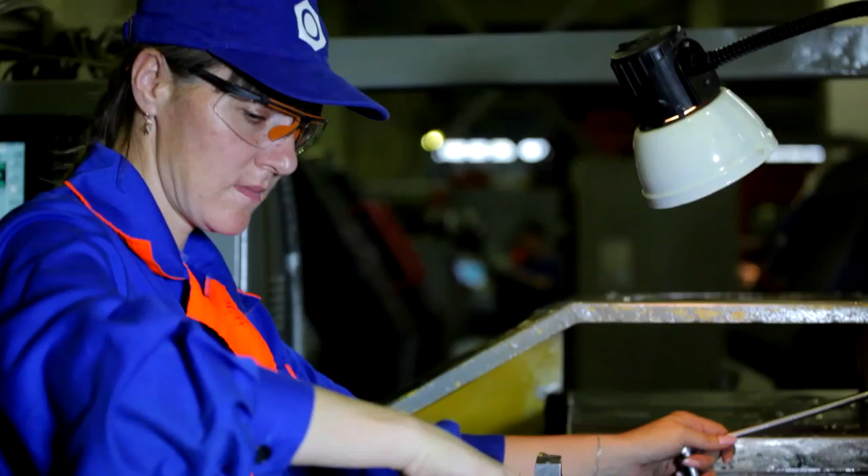Technovek is a multi-profile enterprise. The initial stage of its operation takes us back to the year 2000, and it was certainly the toughest one. We started by only producing studs and nuts for the needs of Lukoil Corporation. It was only the beginning of the great path.

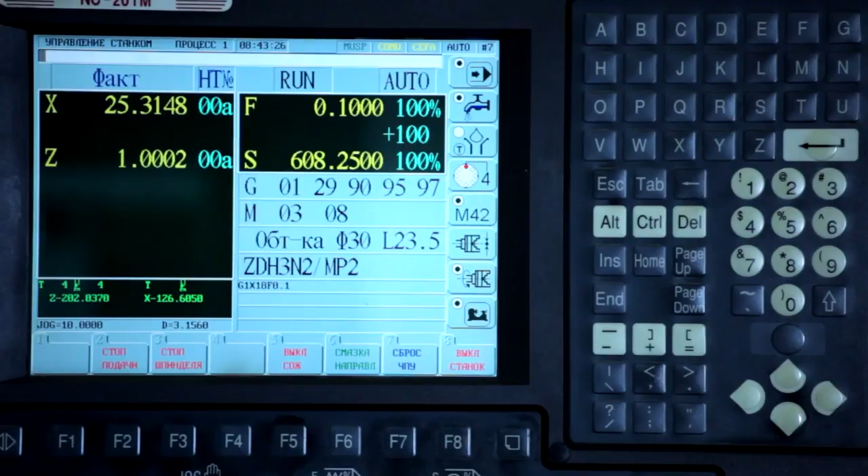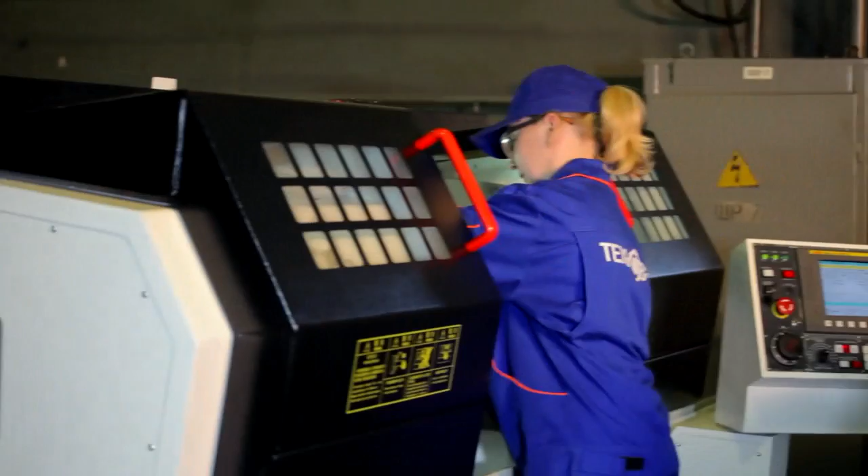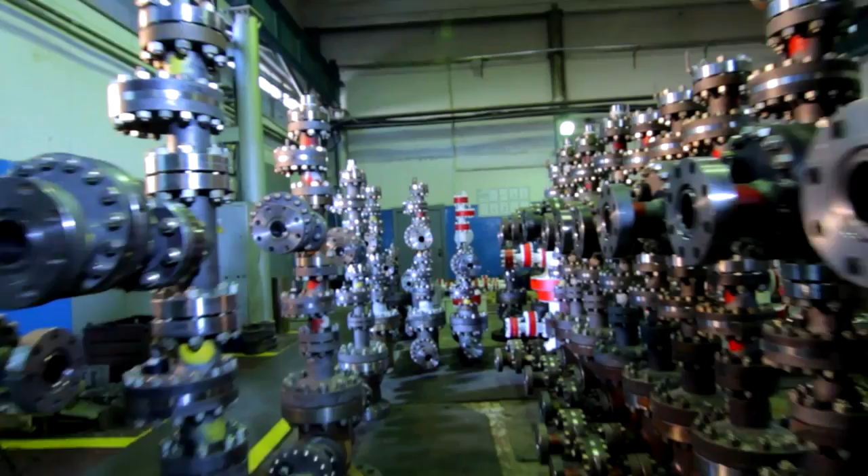Daily, Technovek was working on the development and implementation of new cutting-edge technologies, along with upgrading the company's production equipment. Technovek implemented its own development plan, which consists of several parts, such as increasing production volume, broadening its production line, raising its performance level and competitive ability, broadening its client base, and creating new workplaces for people.

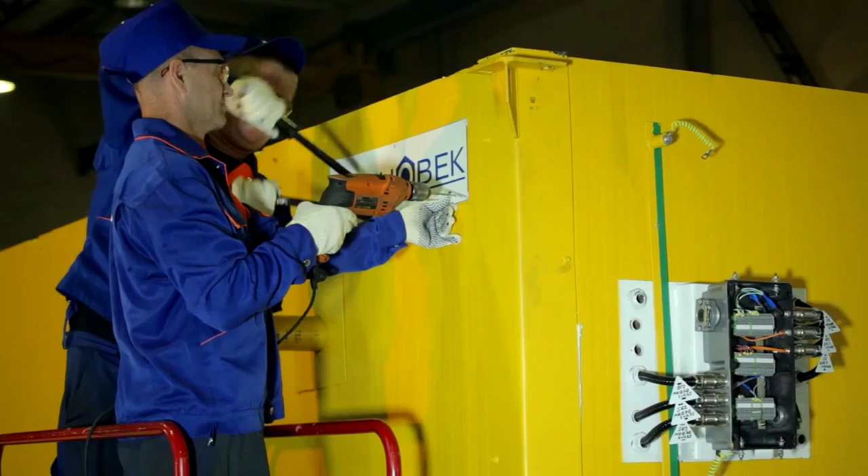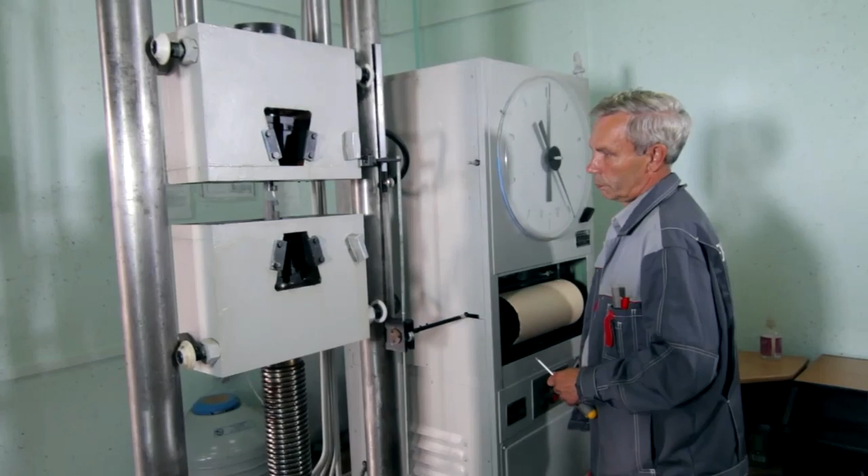As of today, our product quality complies with all requirements of the ISO 9001 standard, which guarantees high-quality production of all styles and shapes. We're currently in the process of acquisition and approval of the API Q1, 6A, and 6D certificates, which we will acquire within approximately 6 to 9 months. It is only the start of our brand management and quality control system.

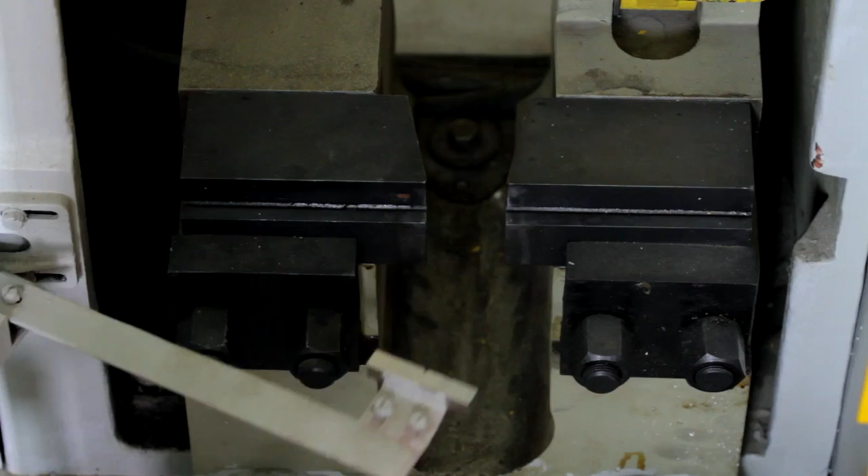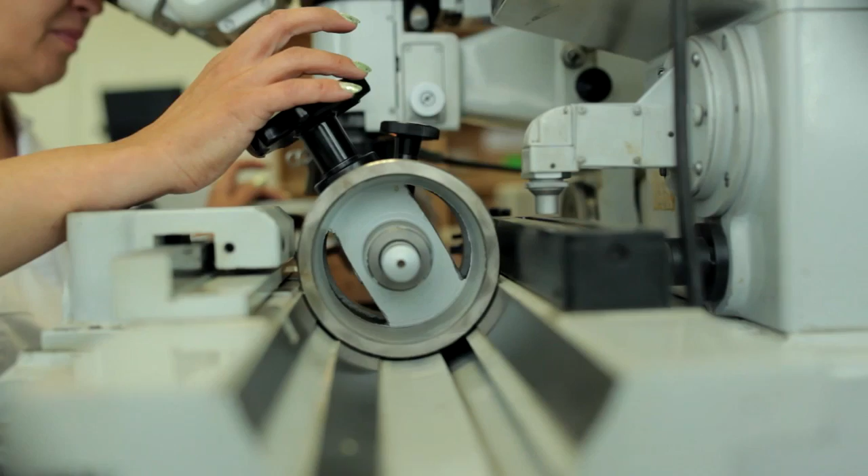In our research lab, specifically designed for conducting destructive and non-destructive studies, our specialists test various materials for their chemical and mechanical features. We conduct tests for tensile strength, resource, and resistance, including tests at below zero temperatures. Ultrasonic, surface, and capillary tests are also part of our routine.

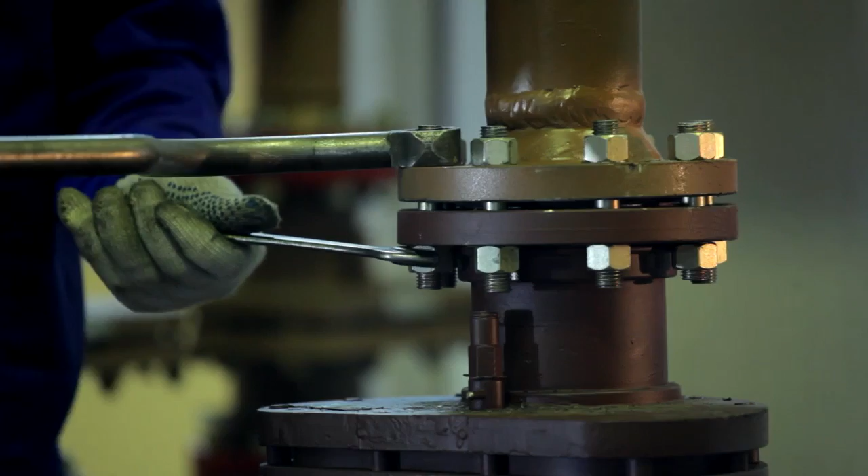Regular checking and calibration of measuring tools and equipment takes place in our other lab and is conducted by certified professionals. Today, Technovek has gained a reputation as a reliable partner and maker of quality, competitive oil and gas equipment.

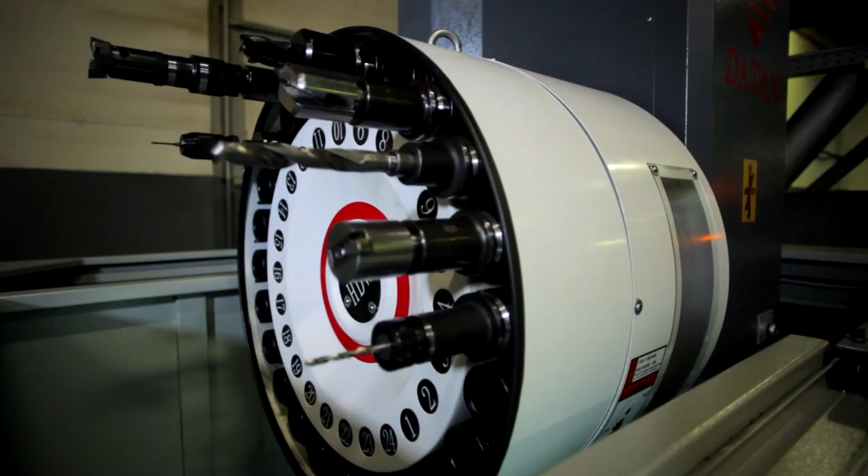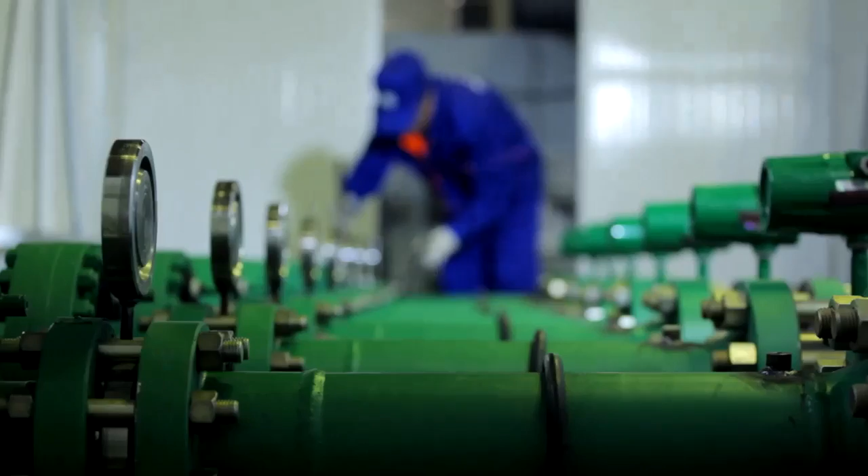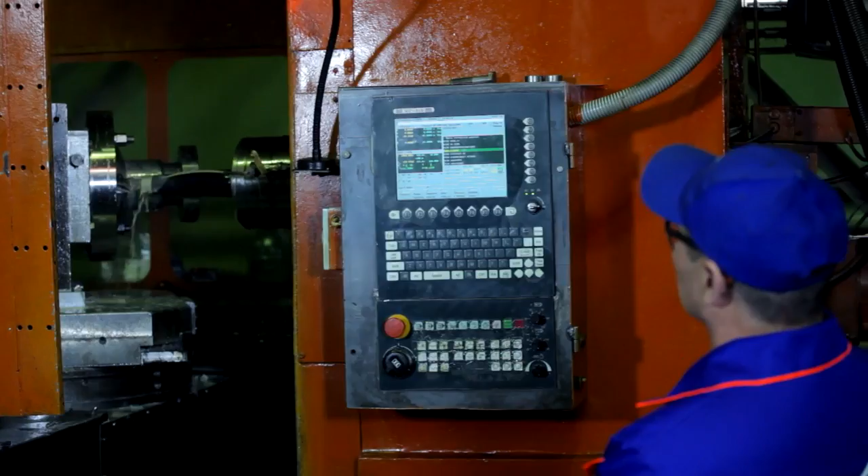Since 2011, we follow the newly, scientifically developed concept of thrifty operation, based on management of unnecessary losses and waste, involving not only management but also all employees of the overall Technovek facility. In line with the well-known 6S system, we follow all principles of safety and security for each workplace and the plant at large. With this, we are also successfully managing the effectiveness of pure work time at every workplace.

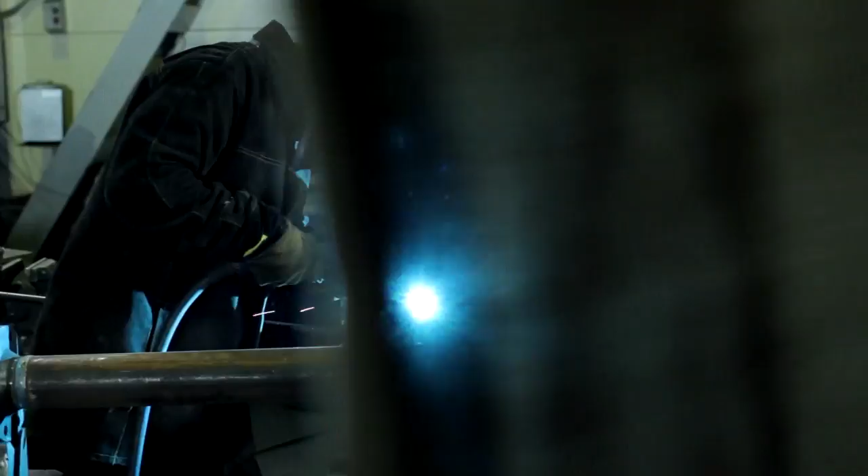Safety and quality are slogans for our employees. Employees are the ones who certainly make it happen. So one of the key aspects of our care and focus is a social vector and responsibility.

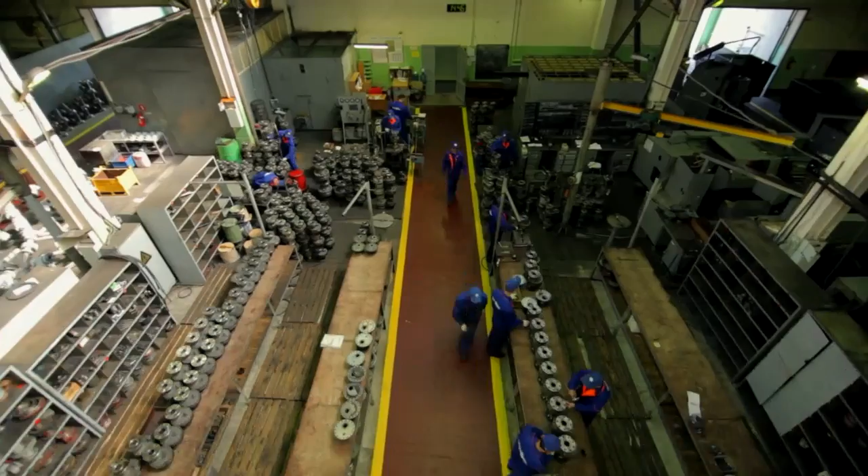Our enterprise employs over 1,000 people. The average age of an employee is about 35 years old. We pay people well above the federal average wage, and on top of the mandatory social obligations, we offer our employees a variety of other benefits.

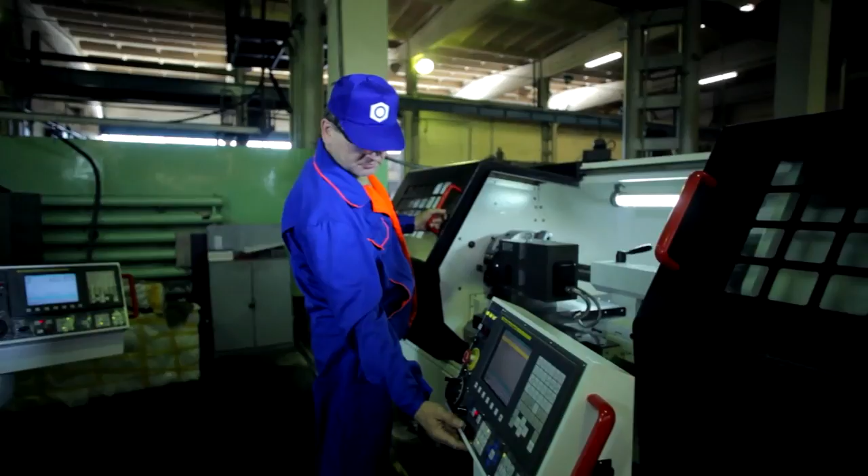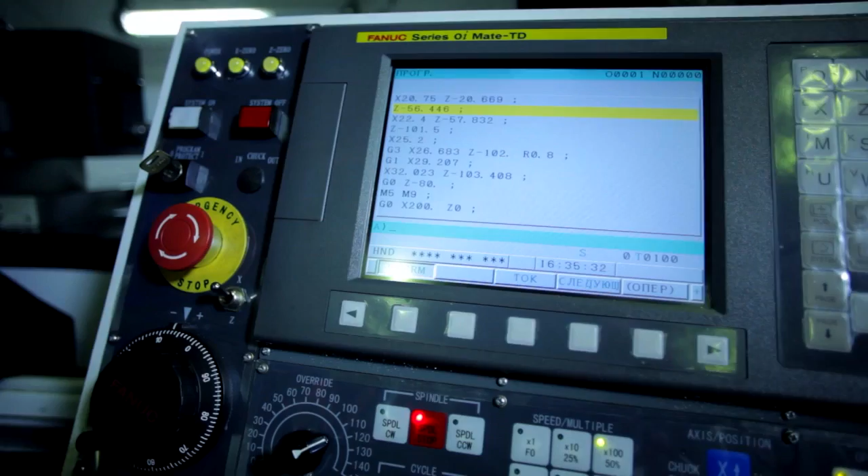In our days, modern technologies are developing and progressing with impressive speed in the 21st century. Something that was cutting edge yesterday is barely useful today and almost obsolete tomorrow. We heavily invest in new technologies and research.

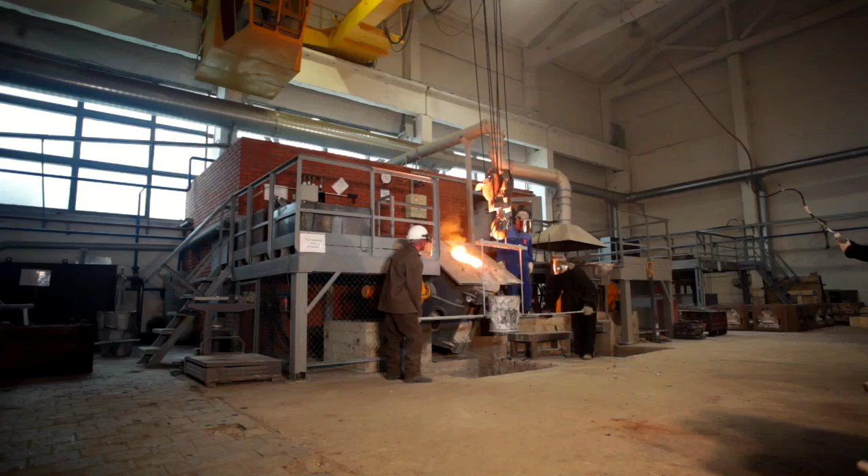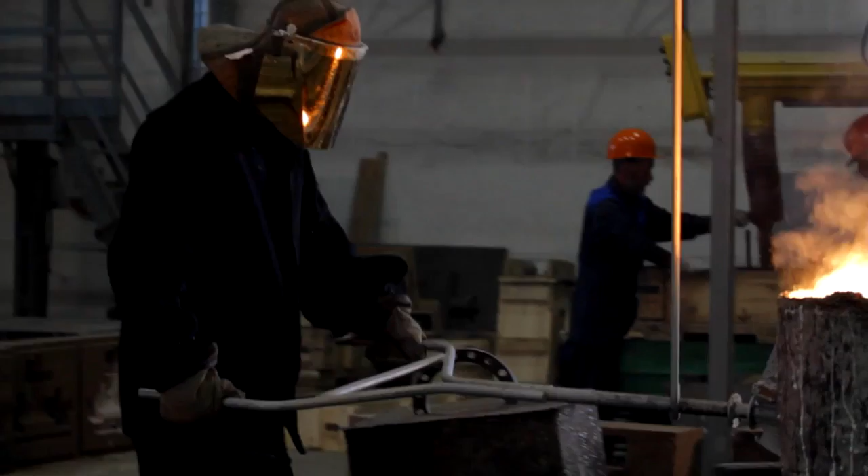Thus, from 2012, we have launched our own foundry, which allowed us to better and faster accommodate our clients' requirements and rely only on our quality standards without depending solely on suppliers. Since launching, we have mastered the cold hardening casting method. We also launched our DC arc furnace and induction furnace as well.

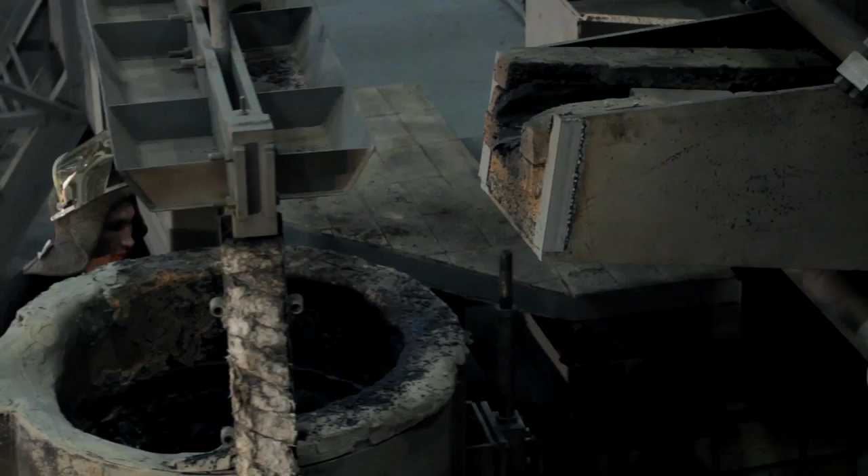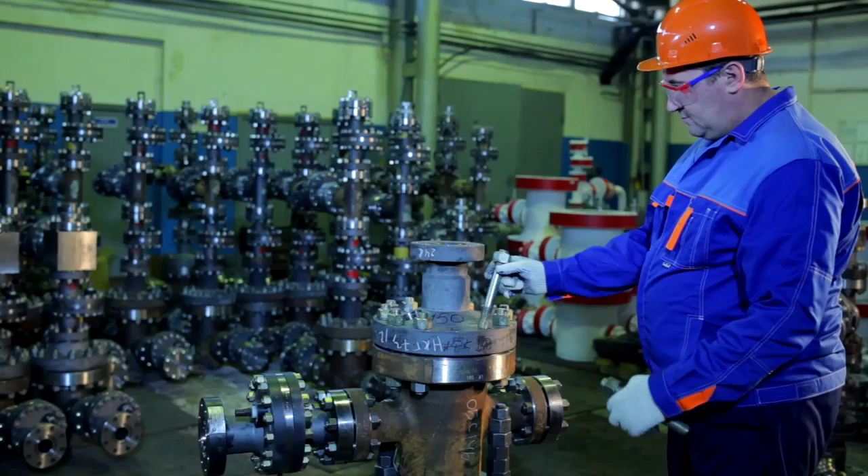The Technovek plant is situated on 10,000 square meters of land. Over 350 pieces of equipment of various complexity operate on a 24-hour cycle basis in 14 industrial buildings. Monthly, we produce over 4,000 various gate valves and over 500 various modification Christmas trees.

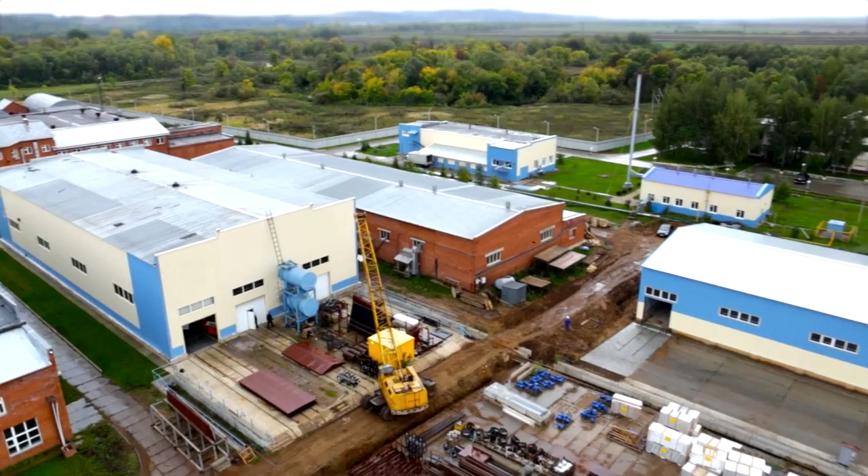With the broadening of its production line, Technovek is constantly buying new equipment from world-known brands that guarantee high quality. We are also currently in the process of constructing a new building which will be home to a large block equipment assembly shop, an additional warehouse, and another administrative building.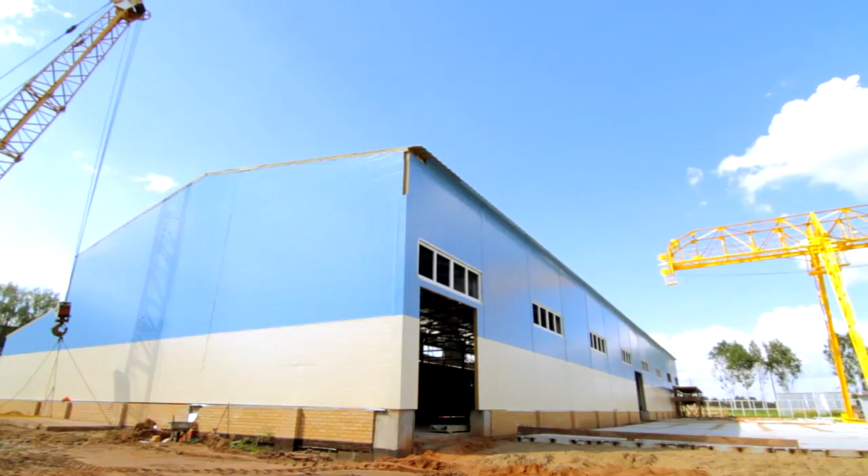Our construction and design department is aimed at our product specifics and is capable of fulfilling all kinds of complicated technical tasks. It employs 40 highly educated professionals who carry out all design and technical documentation strictly following the Unified Design Documentation System.

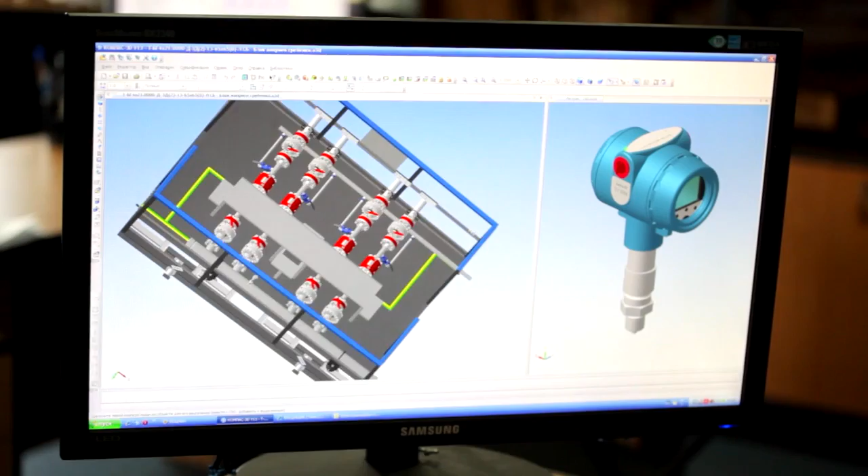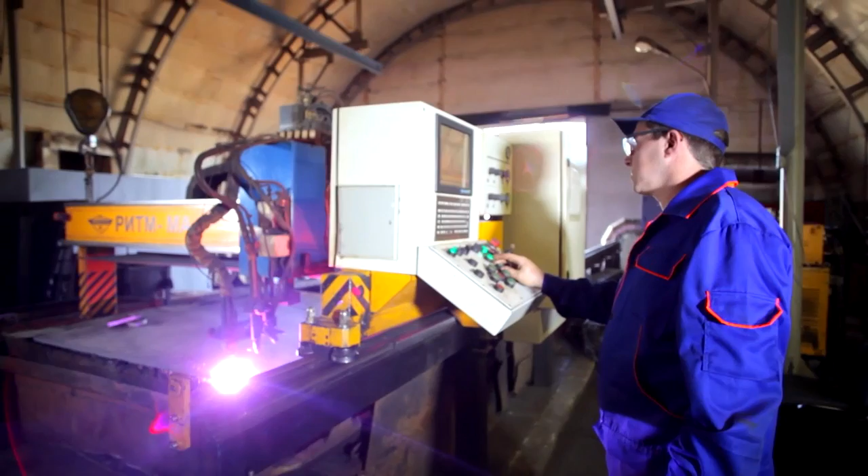The latest cutting-edge IT technologies are used. During its years of operation, the design department developed and introduced over 1,500 various complexity technical solutions. 16 of them are officially patented and 30 more are currently in the process of having their patent rights reserved.

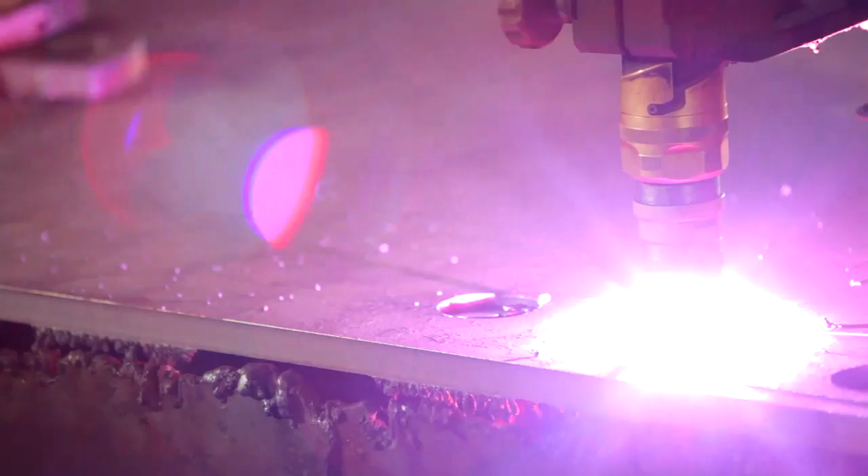Technovek is regularly audited on an annual basis. In the past, we were audited to comply with ISO 9001 certification of quality. In the year 2016, we will be audited for compliance with API standards.

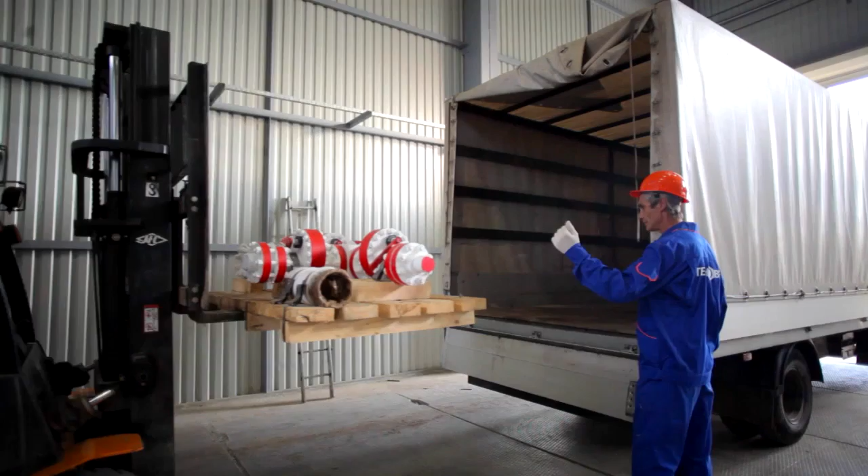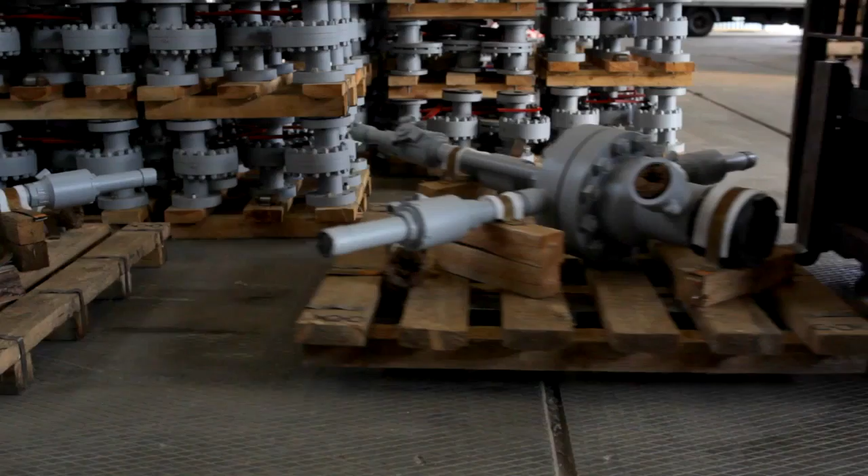Technovek is constantly looking to widen its production line and add various new products to it. Our catalog offers over 200 different units of equipment, and each of them could be manufactured in various different modifications.

Our production line features wellhead equipment, reservoir pressure maintenance equipment, shut-off and control valving, filtering equipment, lubricators, pipe isolating systems, and measuring units. We produce our equipment in accordance with customer specifications.

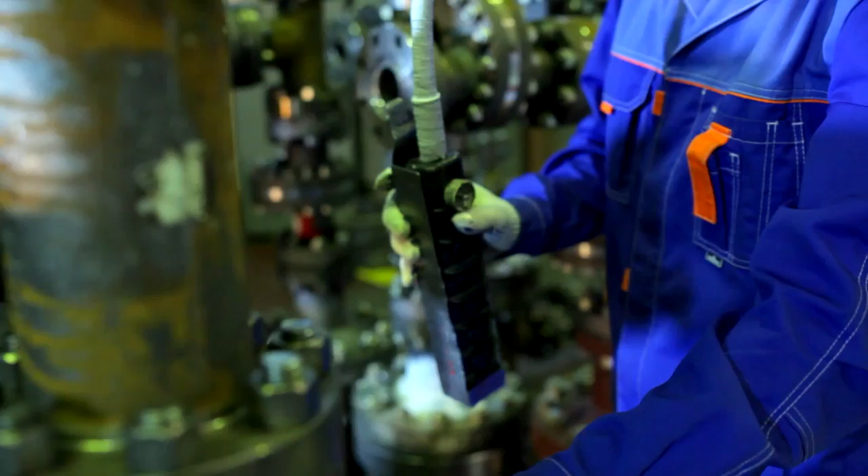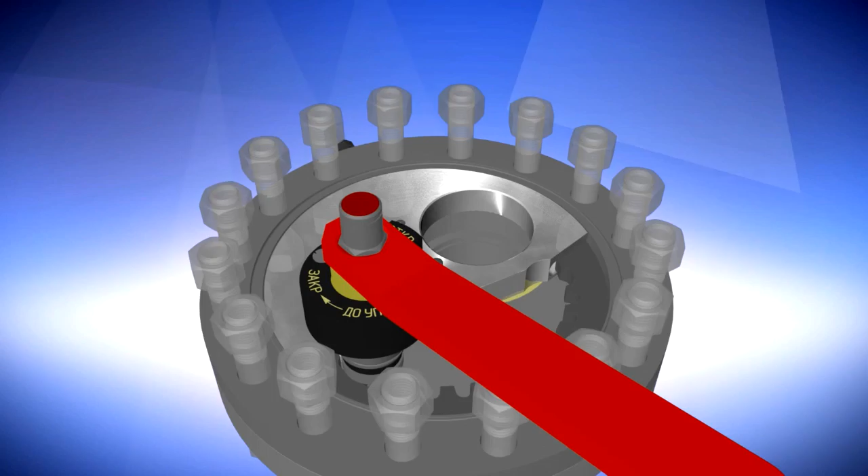Designed and manufactured at Technovek, our famous disc gate valve is used as part of Christmas trees, injection manifold units, and pipelines. In comparison with conventional gate valves, Technovek's ZD type valve is equipped with one motion arm.

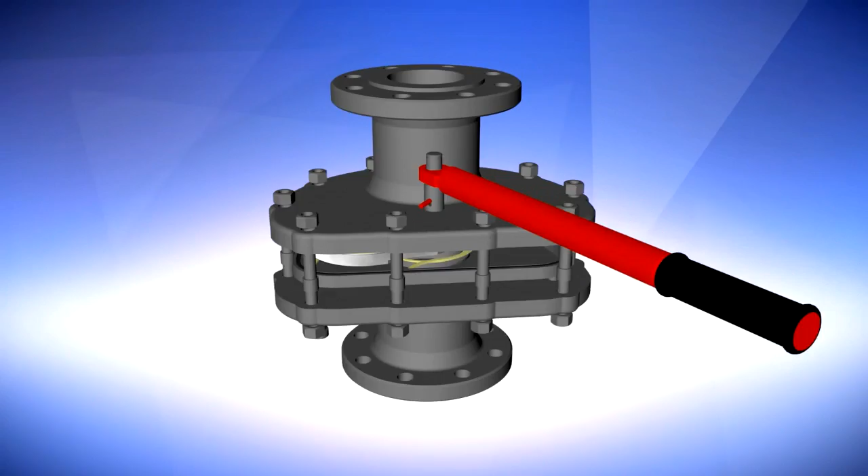Minimal inside free space allows shutting and opening in critical temperatures without additional prior heating. It is very easy to mount and maintain. In addition to the basic model, there are disc choke 3-position valves and revolving type valves.

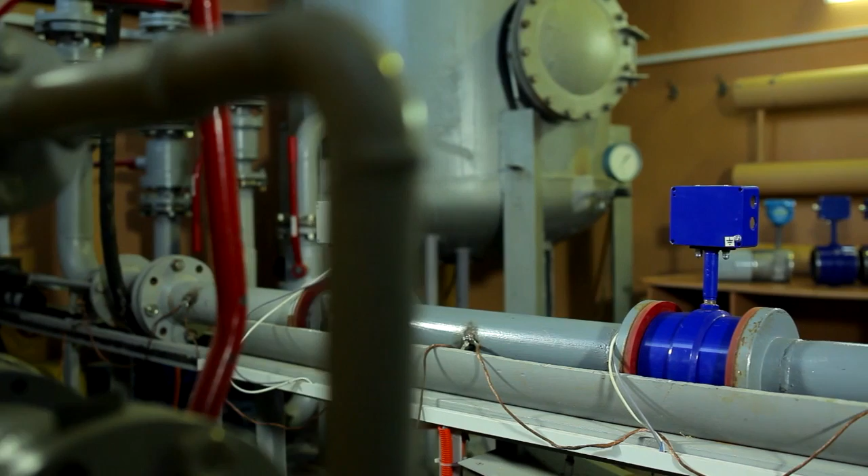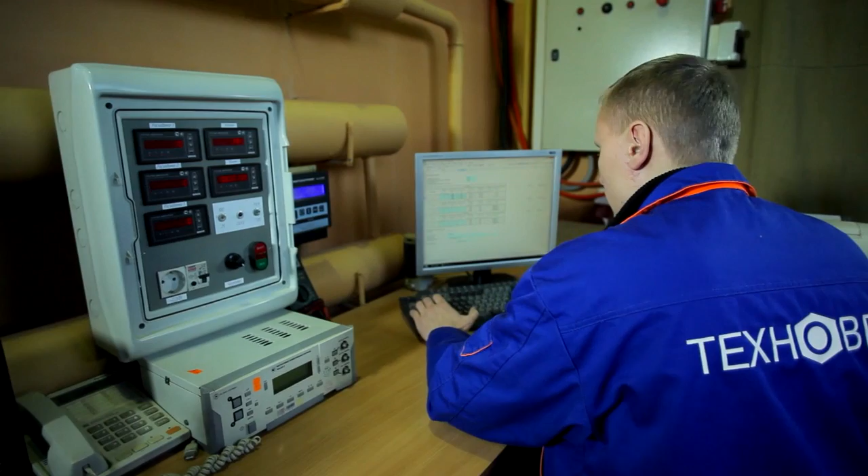Technovek pays close attention to the most recent high-tech trends applicable to the industry. Our highly technical flow meters are designed to take measurements in a wide pressure and temperature range with increased associated gas factor, high flow inconsistency, and also near angular bendings in pipelines.

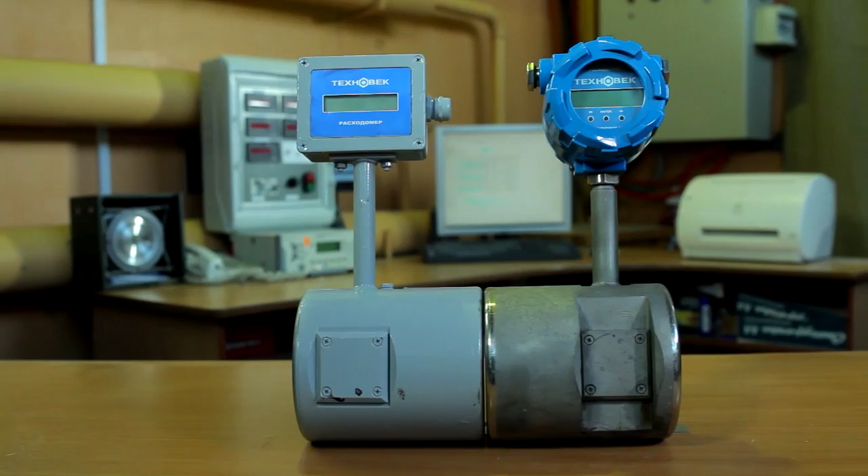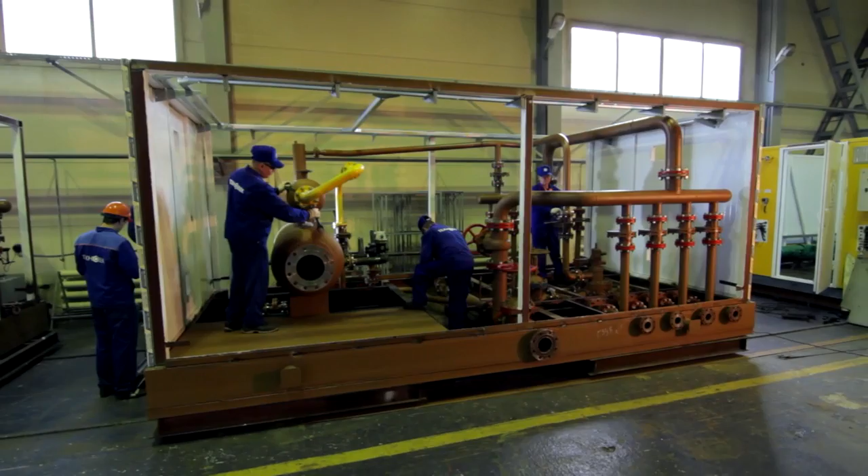We have also mastered the production of vortex acoustic sensors for our flow meters. From the year 2011, we manufacture our GZU measurement unit that is designed for precise measurement of gas and crude oil components of the flow. The obtained data could be digitally collected from several wells and sent to the dispatch control unit for analysis.

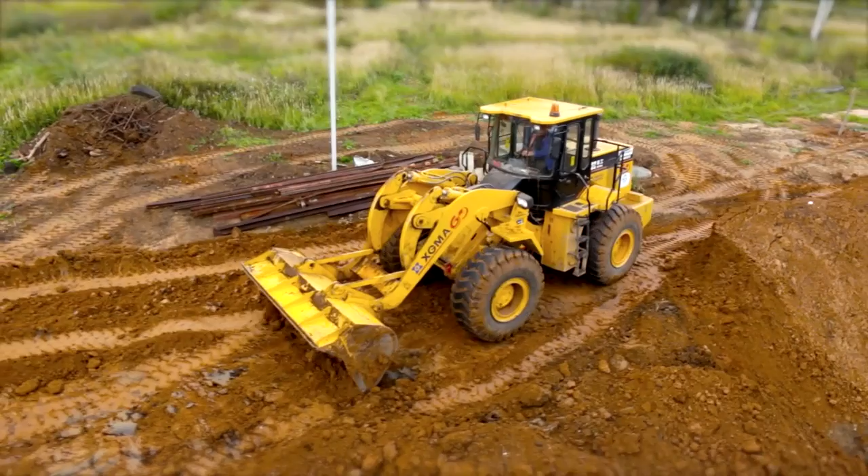Technovek has its own building construction unit that fulfills its own construction projects of different levels. We have also launched our own transportation department, which will deliver to any point in the world. It also takes care of delivering materials for the purchasing department and also employee transportation.

The best proof of our good quality work is the great and grateful responses from our steady clients, like Rosneft, Lukoil, Gazprom, Tatneft, Bashneft, and others. Also, Technovek was included in the list of best producers of wellhead equipment by the Russian Oil and Gas Ministry.

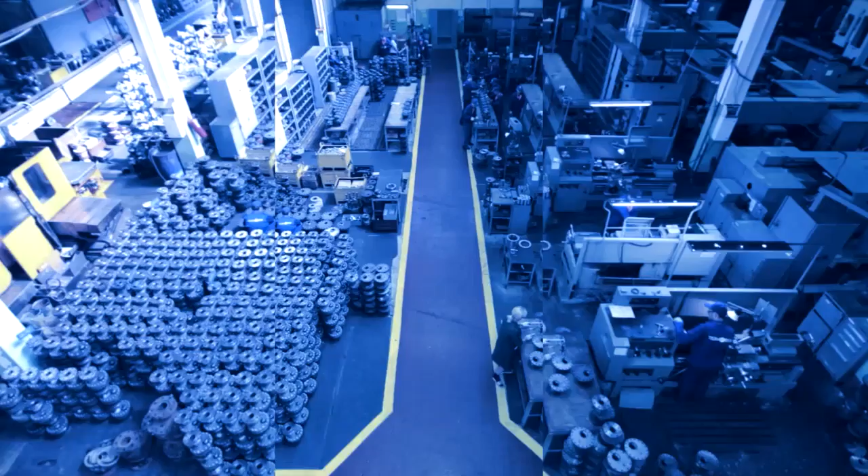Great traditions, vast experience, and highly skilled, responsible personnel of Technovek are all a guarantee of the excellent quality of our products, which suit the highest levels of world standards.